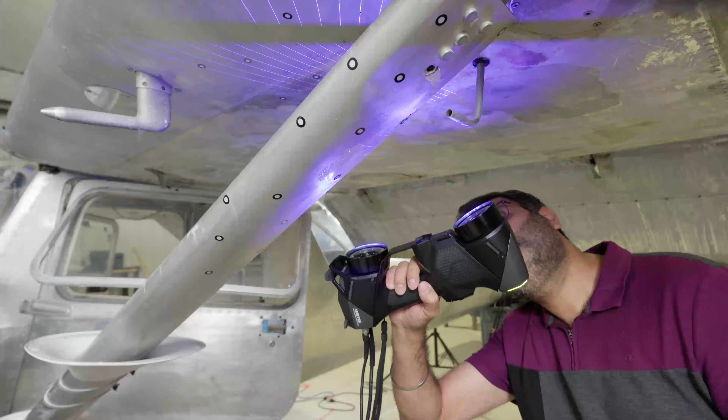What you're seeing here is the first version of a remotely piloted aircraft. We've retrofitted a Quad City Challenger 2 ultralight with our hardware and software and successfully demonstrated automated taxiing, takeoff, and landing. Now it's time to move to version 2, and we've chosen the Cessna 150 as our next platform to modify. In this episode, we're using a laser scanner to create a detailed 3D model of the aircraft, a crucial step for designing our autopilot installation.

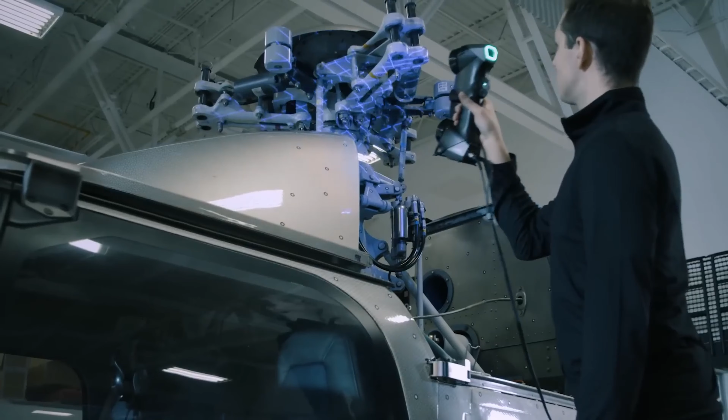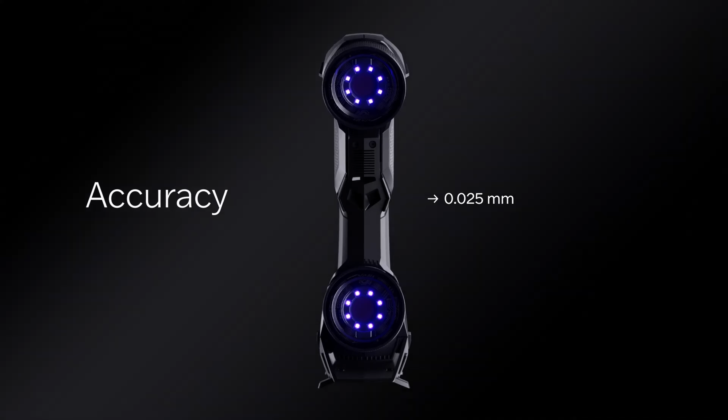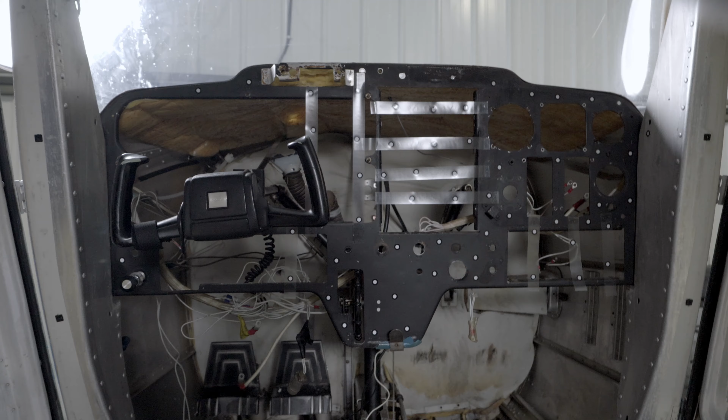This data gets sent to a computer, and using special software, we're able to combine the measurements and visualize our part. Today, we'll create a model of the instrument panel, rear cabin, strut, top of the fuselage, and the first part of the tail cone section. But unless we have a box of stickers, we're going to fail.

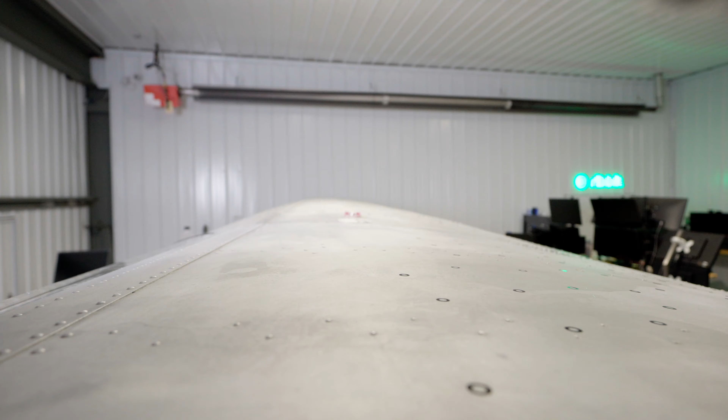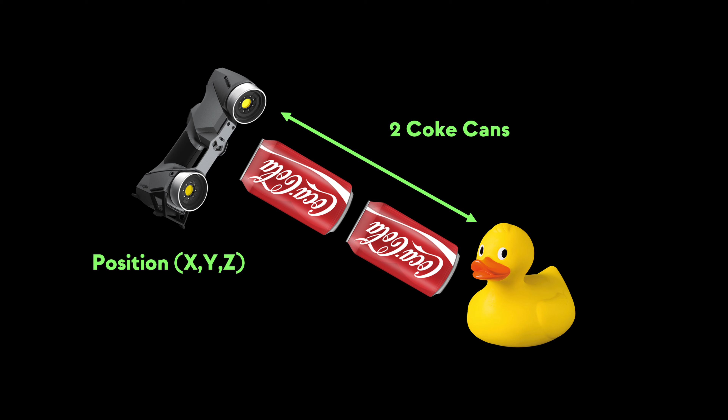The 3D scanner uses a similar concept to locate itself in 3-dimensional space using randomly placed reflective stickers. With the scanning head's known position and the distance measured by the laser, the software is able to fuse the data to recreate a virtual representation of the part.

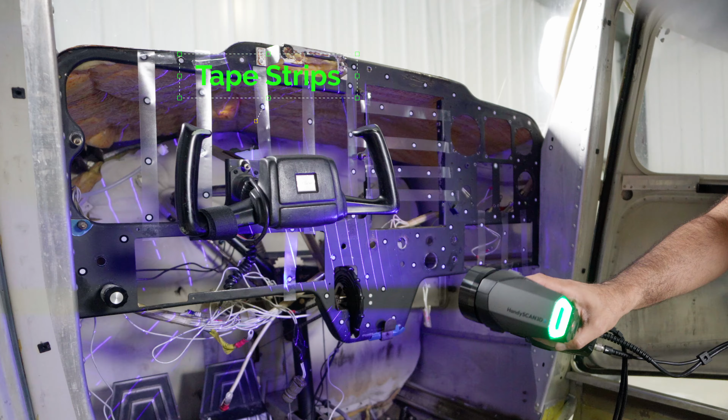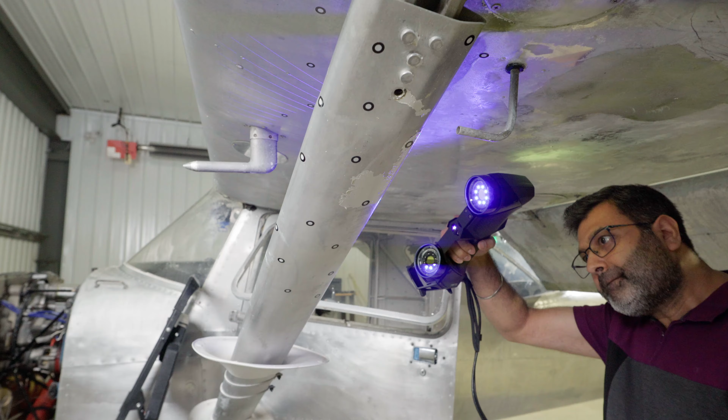On the instrument panel, we had to take extra precaution by adding strips of tape with reflective markers over the large panel gaps to prevent the scanning head from losing its location. Additionally, as we scanned around the strut, there were brief moments where not enough markers were in sight for the scanner to know where it is. Fortunately, adding more reflective markers is an easy fix.

We finished scanning the plane, but our challenges aren't over. Planes are kind of a funny shape. We've got random curves, edges, and flat surfaces with no obvious physical reference for the location of the center line of the aircraft and the 2 other axes.

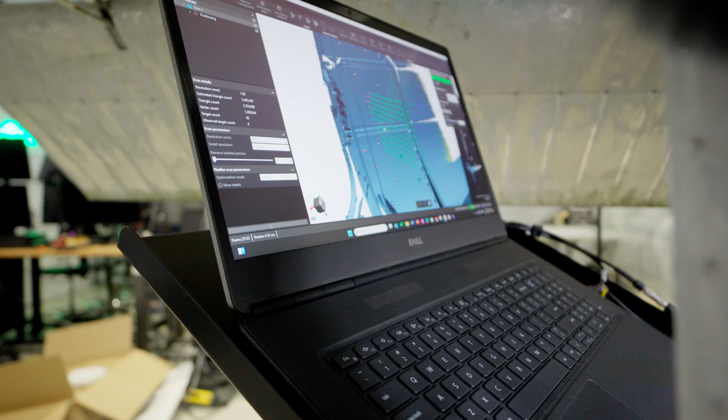This is important because when we start designing parts, we may want the orientation to be aligned with the axes of the aircraft. For instance, if we mount a payload on the strut, wink wink, we don't want it to be crooked. Solving this problem takes a bit of creativity and making some assumptions.

For the scan of the strut, we assumed that the pitot tube was aligned with the free stream air during the cruise configuration, meaning that if we were to use it to define the axis that aligns with the front and the back of the aircraft, there's a good chance that a payload hanging off the strut will look straight when flying. Then, we assume that the rivet seam running along the spar is what defines the axis running from one wingtip to the other.

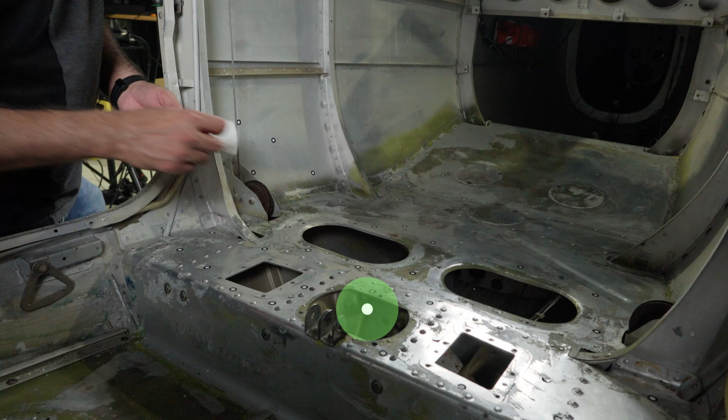In the rear cabin section, we solved this problem in a different way. While looking through an inspection panel on the floor, we found the landing gear attached to a big piece of cast aluminum with 2 inclined planes. On the computer, we're able to click on the surface representing those locations, and the software gives us a measurement of how flat the surface is.

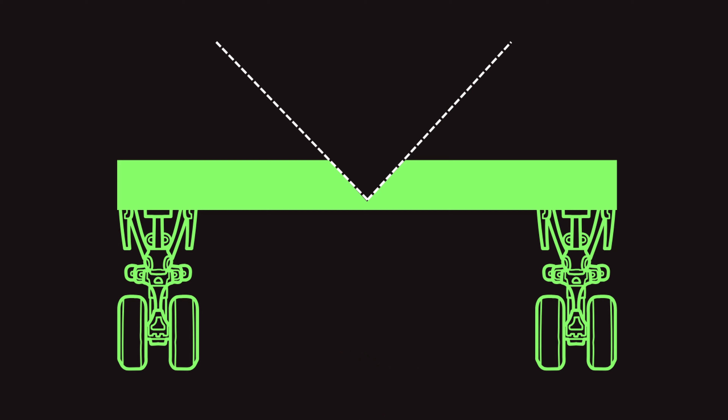If flat enough, we're confident we can use it as reference. Indeed it was, so we assume that the intersection line between those 2 inclined planes would define the center of the aircraft. The last part required to create a nice model is to remove the features that aren't essential.